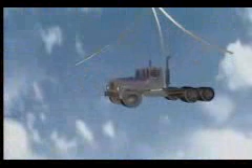Throughout the course of history, man has come up with many unusual ways to demonstrate his strength. With all these remarkable feats of strength, to date, no one has attempted to catch a semi-tractor. But did you know 1 cubic yard of soil weighs approximately 1.5 tons, the same as a semi-tractor?

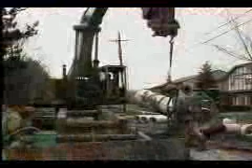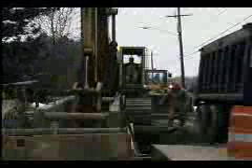Working below ground level in an excavation or trench can expose you to many potential hazards. Cave-in accidents are one of the leading causes of death and injury at excavation and trenching job sites. By understanding and respecting the potential hazards and following safe work practices, you can ensure not only your own safety, but that of your coworkers too.

In this program, we will discuss how to plan your excavation and how to work safely in a trench, including the potential hazards involved in excavation, how to protect yourself from potential hazards, and safe work practices for excavation. There are 2 main hazards associated with excavation and trenching: contact with utility lines and cave-ins or ground slides.

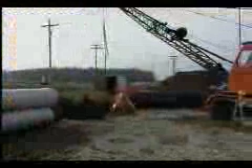When planning an excavation, you should always check with utility companies to determine the location of all lines at least 24 hours before opening the excavation. Most utilities have a person or office that will provide this information. It is best to have the utility companies mark the location of their lines. When boomed equipment is used for excavation, you must have a minimum 10-foot clearance from the boom to overhead electric lines. Electric utilities are not the only potential hazard.

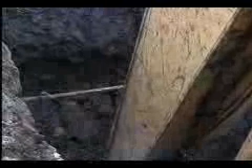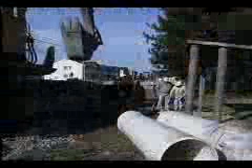Water, steam, gas, or sewer lines may create additional potential hazards, such as flooding, explosion, fire, or hazardous gas leakage. Make sure all these lines are either shut off by the utility companies or that extreme caution is used when working around them. It is important to recognize, too, that when underground utilities are in your excavation site, the ground will be less stable than undisturbed soil.

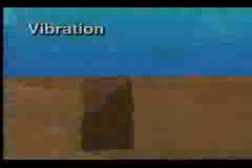As mentioned earlier, cave-ins are a serious potential hazard. A cave-in is defined as a separation of soil or rock from the side of an excavation, or loss of soil from under a trench shield or support system in enough quantity to entrap, bury, or otherwise injure or immobilize a person. There are 4 primary causes of a cave-in: vibration, weight, water, and soil composition, or how the soil is made up.

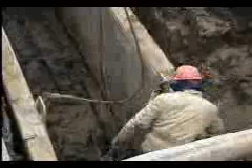Vibration from construction equipment or street traffic can make relatively stable, compact soil come apart and cause a cave-in. You should be very alert to this danger when working near a well-traveled street. Every precaution should be taken to protect yourself in the trench, and you should keep careful watch of the surrounding area for cracks or other early warning signs of a cave-in. Keep heavy equipment far enough away from the edge of the excavation to make sure the vibration set up from their movement is not putting an additional strain on the trench walls.

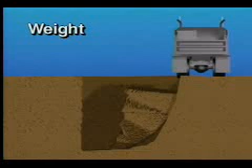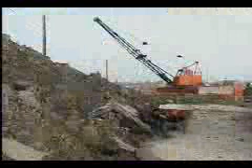The weight of heavy equipment can also be a hazard if operated or stored too close to the trench opening. This additional weight can overload the trench walls and cause a cave-in, so keep heavy equipment well back from the edge of the trench. The weight of your spoil bank or the soil you've taken out of the trench can also be a hazard. As the spoil bank grows, the weight increases until excessive pressure is put on the trench walls, causing a cave-in. Plan ahead to keep the edge of your spoil bank at least 2 feet from the edge of the trench.

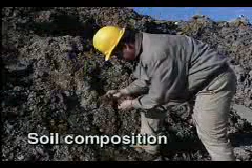The texture or cohesion of the soil is the key to how stable the soil will be as you are excavating. No matter how much experience you have excavating in your area, it's good to remember that every soil is different. No 2 jobs are the same, and every situation can be hazardous. Pay close attention to the soil you are working in. The soil should be tested by a registered engineer or a competent person before excavation begins to determine the soil composition.

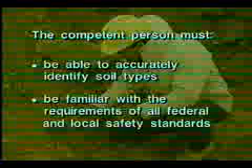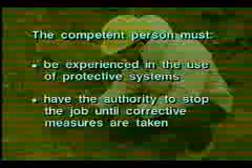A competent person not only must be able to accurately identify soil types, but also must be familiar with the requirements of all federal and local safety standards and be experienced in the use of protective systems. And the competent person must have the authority to stop the job until corrective measures are taken to eliminate potential hazards.

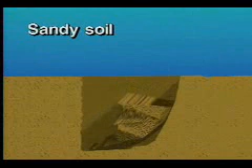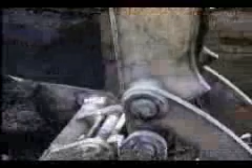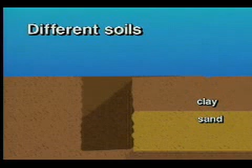Generally, the more cohesive the soil is, the more it sticks together rather than crumbles. For example, a sandy soil can slide back into the trench since sand is not cohesive. On the other hand, solid rock, shale, or clay is very cohesive. As you excavate the trench, you may come across different soil consistencies along the length of the trench and at different depths. Remember, if the soil consistency changes, there is a hazard. For example, if a clay layer is resting on sand, it's possible for the sand to shift and undermine the trench wall, causing a cave-in.

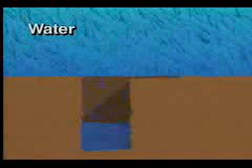Water is another potential cause of a cave-in. Water from the surface, groundwater, or the moisture content in the soil itself may reduce the soil's strength and stability. Rain can also be a hazard, since it can make the banks of the trench collapse due to excess weight, or it can fill the trench with water. To prevent water from collecting, use a diversion ditch or a dike to channel the surface water away from the trench. Use a pump to keep rain or groundwater from collecting at the bottom of the trench.

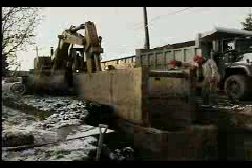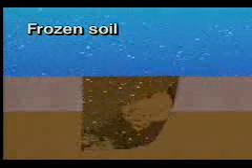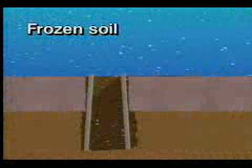In addition to rain, an extreme change in temperature can make soil unstable. Usually frozen soil is very cohesive, but unfrozen soil below the frost line will be less cohesive, may undermine trench walls, and cause a cave-in. Also, freezing may expand the soil behind any shoring you may have in place or any soil piled near the edge of the trench. This can increase pressure on the trench walls and cause a cave-in.

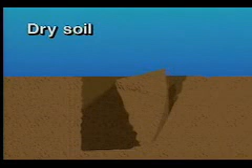You may also be working as the soil thaws out. If this happens, be on the lookout for mudslides and cave-ins. And it's possible for heavy equipment to slide in the mud and topple into the trench. A lack of moisture in the soil can also be a hazard. Dry soil tends to crack and cause the trench walls to collapse. Remember, as the trench gets deeper, the likelihood of a cave-in is greater.

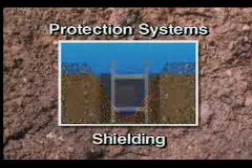Now let's take a look at how you can protect yourself from cave-ins. There are 3 cave-in protection systems available to you. They are sloping, shielding, and shoring. Remember, excavations of more than 5 feet deep in any type of soil must be provided with a protective system. And if a potential hazard is identified by a registered engineer or the competent person, excavations of less than 5 feet must also be protected.

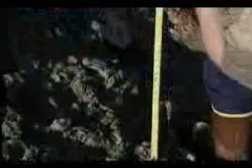If there's enough room at the job site, an excellent way to protect yourself while excavating is by sloping your trench. The trench should be graded to the maximum allowable slope, the angle at which the soil will lie without moving. The maximum allowable slope will vary with different soils and will need to be determined for each job. If you're in doubt about the type of soil, it's better to make the angle as flat as possible. And when water is present, the angle must be even flatter. Sloping works best for shallow trenches requiring a small work area below the surface of the ground. It's very difficult for the untrained eye to measure this angle accurately. All measurements should be performed by a registered engineer or a competent person.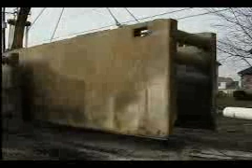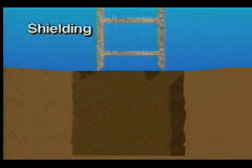Shielding is a structure that is able to withstand the forces of a cave-in and will protect the workers inside. The shield is a prefabricated movable box, usually made of metal. It's a good practice for the box to extend above ground level. If the shield is installed below ground level, the trench walls must be sloped to allow 18 inches of the shield to extend above the edge of the trench.

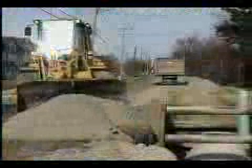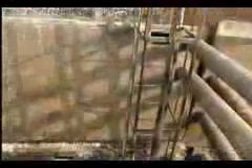The shield is moved along as work progresses, and the trench should be backfilled as soon as the work in a particular area is finished, so no one will go into an unshielded trench. It's important to remember that a shield is not designed to prevent cave-ins, since the shield ordinarily does not fit snugly against the walls of the trench. Workers are only protected as long as they are inside the shield.

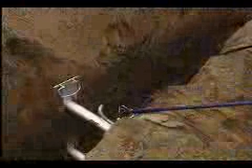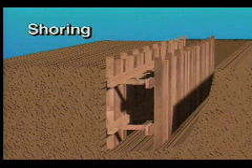Shoring is a structure that supports the sides of an excavation and is designed to prevent cave-ins, since the shoring is placed tight against the trench walls. Shoring may consist of metal or timber, or a combination of both. Federal requirements must be used as the minimum accepted guidelines for both design and installation of the shoring system.

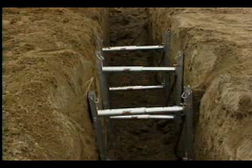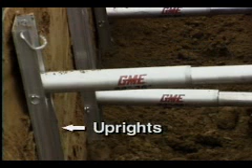A typical shoring system may have braces and uprights. Braces are the horizontal members of the system which hold the uprights together and prevent them from collapsing under pressure. Braces may be hydraulic, mechanical, pneumatic, or be made of timber. Uprights are the vertical members which may be in direct contact with the earth walls of the trench. The braces ensure that the uprights remain vertical.

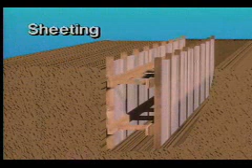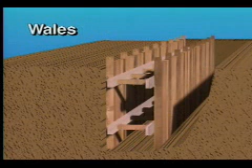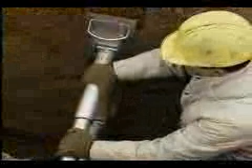In some soil types, sheeting may be used to resist the lateral pressure of loose soil or water. The sheeting should extend above ground level to keep the spoil bank from sliding back into the trench. Wales or stringers may also be used in some applications. The entire shoring system must be tight. If there is any play or give, the shoring may collapse under pressure. Be sure to compact any loose soil placed behind the shoring to tighten it. After installing the shoring, it must be inspected in accordance with federal regulations by the competent person.

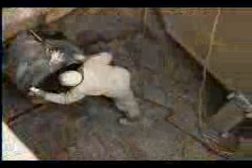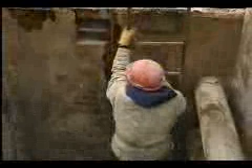While a shoring system will help to prevent a cave-in accident from occurring, there are other general practices to help you work safely around an excavation. In every trench over 4 feet deep, there must be a safe means of entry or exit, usually a ladder. Ladders must be placed so that an employee is within 25 feet of the ladder while in the excavation. And the ladder's side rails must extend at least 3 feet above ground level.

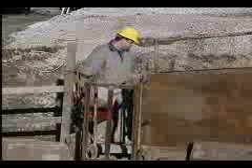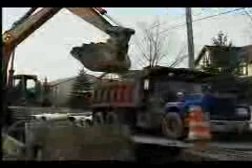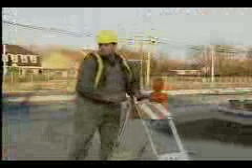All materials, tools, and equipment should be stored at least 2 feet away from the edge of the excavation to reduce the hazard to workers in the trench below. Never walk or stand under loads handled by any type of earth-moving equipment. Stay well away from any vehicle being loaded to ensure you won't be hit by any spills. When exposed to public vehicular traffic while working, wear a vest made of highly visible material and follow the requirements of your job site regarding the use of personal protective equipment.

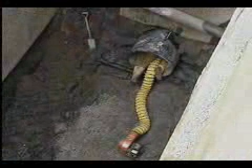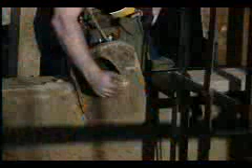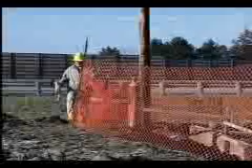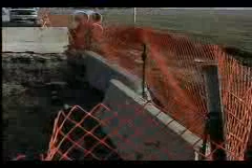Air quality in deep trenches or excavations can also be a cause for concern. If you are working in a bell-bottomed excavation, you may be required to follow work practices developed for confined spaces. If you are excavating in or near an area with known hazardous waste, such as a landfill, you may need to follow procedures to monitor air quality regularly. Excavations should be provided with adequate protection at the edge of the excavation. One way to do this is by using proper barricades. Barricades should be 42 inches high and at least 5 feet back from the edge of the excavation.

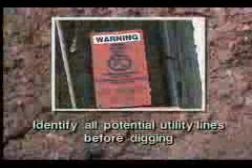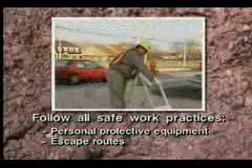Though there can be many potential hazards associated with excavations, you can ensure your safety through awareness, respect, and by following safe work practices. Identify all potential utility lines before digging. Know the type of soil you are digging and utilize the proper measures to prevent cave-ins. And follow all safe work practices, including the use of personal protective equipment and escape routes in the event of an emergency. By utilizing the information and following the procedures presented in this program, you will avoid demonstrating your feats of strength below the ground.